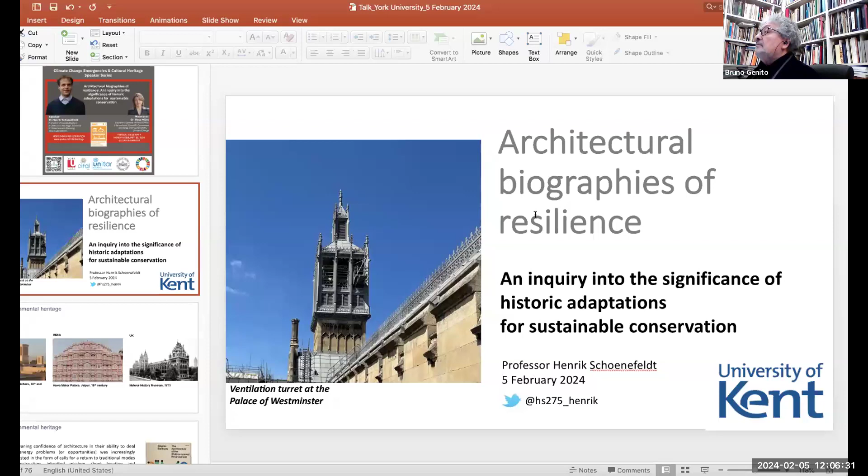Thank you for introducing me. I'm just going to share my slides. Can everybody see and hear me? Yes. So.

I've given this talk the title Architectural Biographies of Resilience. I've used the word biographies because it gives us a different way of looking at buildings that have lived, essentially, like us. As humans, we talk about the lives of people as biographies, but we can also talk about the biographies of buildings, which is essentially the history of buildings in use.

And we can look at buildings in use also from a climatic perspective. So how have buildings in the past that were designed at a particular moment in time continued to evolve and adapt to the changing environment in which they were placed? Because the environment, particularly if we think in much broader terms, is always undergoing change.

And through historical research, it is actually possible to understand how in the past climatic and other environmental factors, such as urban pollution, for instance, have shaped a continual engagement with the relationship between buildings and the environment, and how buildings at times had to be repeatedly adapted using the new advances in technology and new requirements to

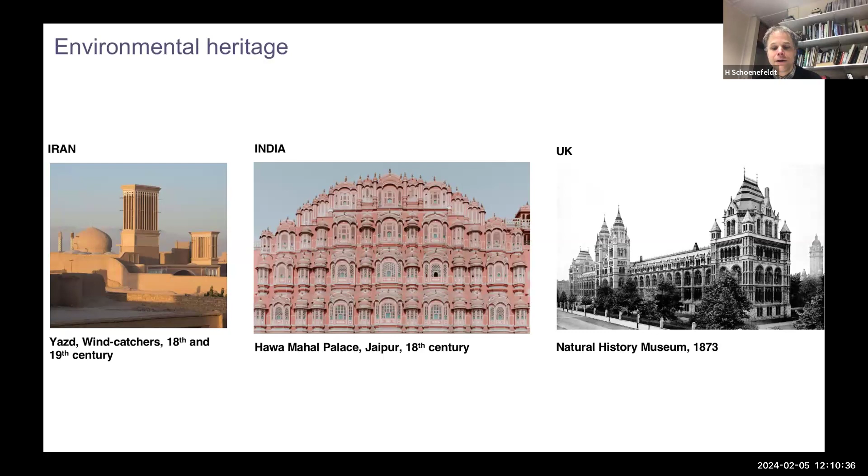but also other buildings that might be less associated with environmental thinking, like, for instance, the Natural History Museum in London, which is a 19th century building, is also for its time a building that engaged with particular ideas of how buildings relate to the environment and the role of technology in that. So we therefore can talk about an environmental heritage in architecture.

And one key thing when we're looking at this is to understand that architectural historians have for a long time really not given sufficient credit to the fact that the development of architecture has been shaped in fundamental ways by environmental and climatic considerations. And in the 20th century, there's one individual, Reyner Banham, who was a very outspoken critic of architectural historians in that respect.

So he published a book in 1969, quite a long time ago, and a period where we maybe would not necessarily expect environmentalism to be at the forefront of architectural writing, but Banham was actually making an argument that the advances in environmental technologies should be part of the canon of architecture history writing, not a side interest of architectural scholarship.

And what's interesting is that this book, originally published in 1969, was written at a time of great enthusiasm about technological advancements and the freedom that developments such as air conditioning and mechanical ventilation provided to architectural development. There was a second edition that came out in 1984, post-oil crisis, where he was actually criticized quite a lot for the types of arguments he was making in the 60s in favor of embracing technological advancements to allow new architectural opportunities.

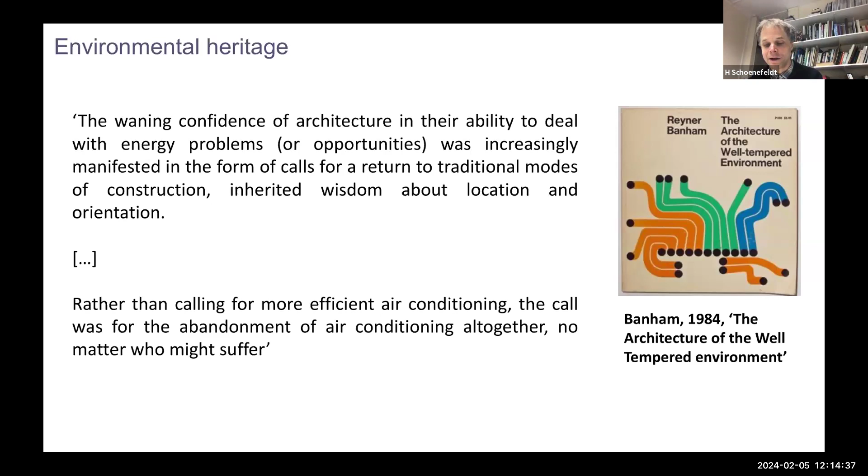So as we are engaging with this sort of criticism, this tension between modernity and traditional principles, we need to find a solution that finds the midway between those two approaches of dealing with the adaptation of existing buildings: not to disregard the historic principle as completely outdated, nor to completely throw out the modern achievement, modern technologies, as being a problem. So it's finding the balance.

And what's interesting is this interest in environmental heritage, of course, is a global thing. I want to really highlight this. Canada has a lot of traditions of indigenous cultures and their way of living with climate. That is part of this vernacular tradition. And there's wonderful work that's been done, particularly by Paul Oliver, who is trying to catalog and map some of these rather under-threat vernacular traditions and ways of living of architecture. That's part of the story of a knowledge and intelligence of environmental design that's embedded in historic structures.

So this is not just entirely limited to studying buildings in the UK, which I may be focusing on today. Methodologically speaking, this is something that can apply to any context. And interestingly, this idea of revival that in some ways Banham was criticizing, people making this naive claim that the past can provide solutions to a more low energy future, is not actually a thing that was isolated.

You have architects working in Egypt, for instance, who were actually making this claim that vernacular architecture can potentially provide solutions to providing more affordable housing using local materials and established methodologies of construction. So he wrote this book, Architecture for the Poor, in 1973. In 1986, he wrote another book, almost a counterpart to it, that highlights the vernacular climatic principles that are embedded in the same kinds of housing he was promoting as a model for a more low energy future.

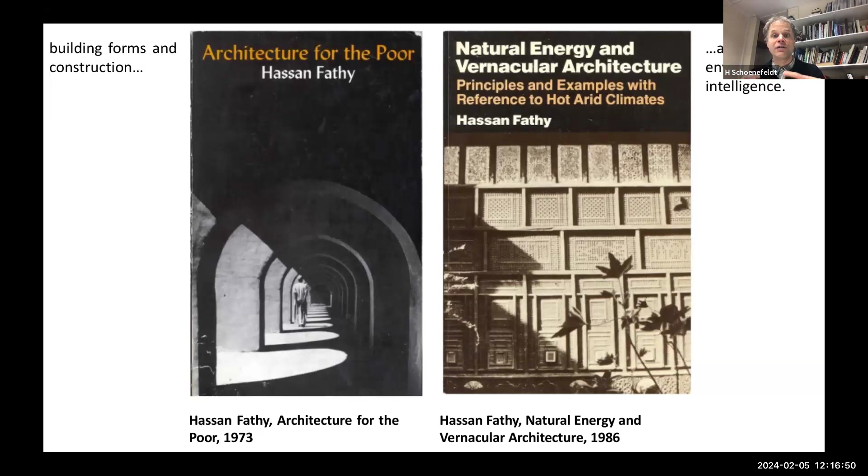So what's interesting is there's an interest here in historic principles as a way of looking forward into the future. Whether this is realistic or not, this is indicating this is not just about studying the past, but it's actually about engaging with the past to look through the lens of our current challenges. And we see some of these ideas actually put into practice in more recent times.

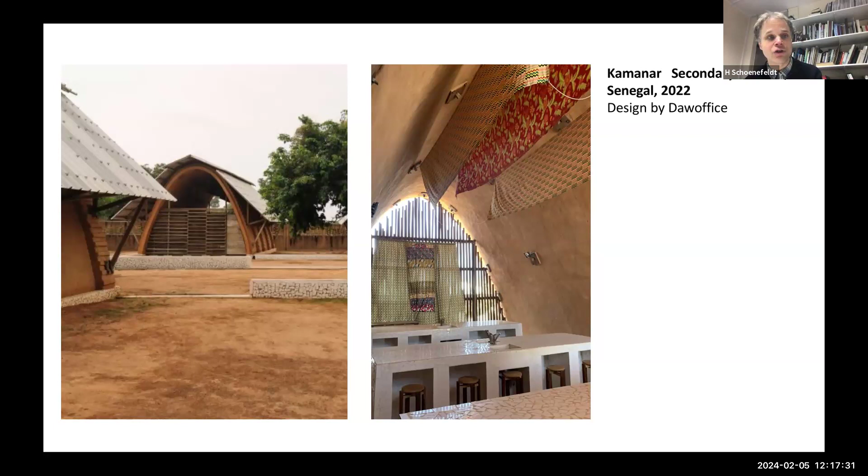So the Dawoffice project here in Senegal, a secondary school from 2022, is an example of a modern attempt at reinterpretation of some of these vernacular principles of designing buildings with local materials and also adapting to climate that didn't rely on heavily mechanical solutions that are heavily energy intensive. So it's an attempt, as Hassan Fathy did in the 1980s, to re-engage with those passive solutions of the region and appreciate the intelligence that we can gain from them.

So this overlaps quite interestingly with other pieces of work that look into this idea of a rational regionalism. Regionalism is very often associated with styles that are very regionally distinct, but that regionalism also has a climatic dimension. So Victor Olgyay, in his book Design with Climate, is exploring that notion that there's a form of regionalism, of climatic intelligence, of adaptedness to the local conditions, that we can potentially learn from to make our buildings more climatically adapted, rather than relying entirely on technologies to adapt to the environment.

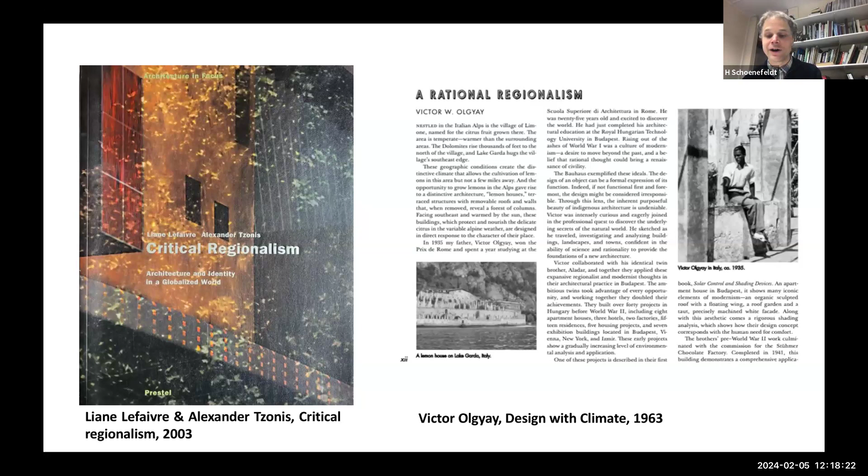And to me, this actually raises an epistemological challenge, because in some ways we have a schism at the moment where we've got, on one hand, a history of architecture that to some degree hasn't sufficiently engaged with the climatic aspects. The scholarship in this area is growing now. It has been growing since Banham wrote. A lot more scholarship has emerged in the area, but there's still quite a lot of architectural history that doesn't really engage with the subject.

So we have an emerging history of environmental design, almost as a sideline subject emerging in the scholarship. There are famous people that were writing in the area, like Dean Hawkes, for instance, writing for a long time about the history of environmental design in architecture. And we find actually something rather similar emerging. So we've got the schism between architectural history and history of environmental design.

But we've also got a problem where we're looking at architectural heritage problems today as being a contemporary issue, without the understanding that architectural heritage, in its relationship to climate, also has a historic dimension.

So I believe that actually architectural history is a means of establishing a dialogue between questions of environmental design and historic buildings today, and the environmental principles that are inherent in the design of those historic buildings. So when modern engineers come in and want to introduce new technologies, rather than trying to work with the historic environmental principles, that can be an issue.

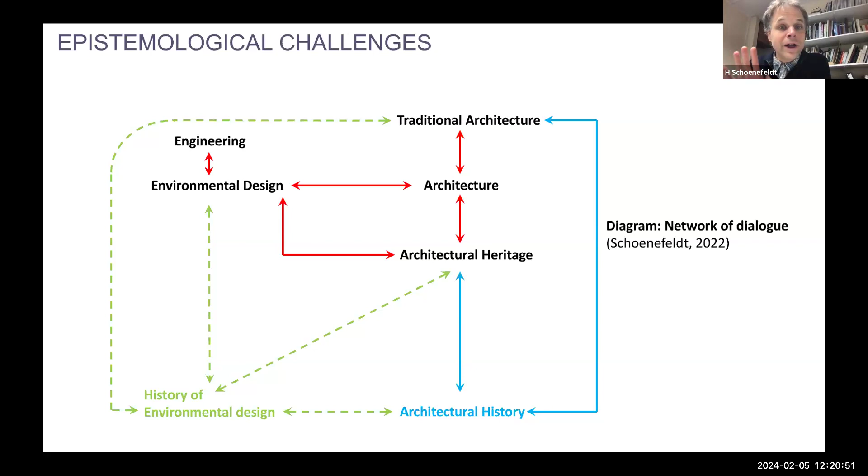So that is sort of a way of conceptualizing that, and we're seeing this in this contrast between Reyner Banham bringing an environmental dimension in the 1960s, and another book that was written almost at the same time, The Sources of Modern Architecture, which talks about some of the same buildings that Banham talks about, without making any reference to the environmental dimension of the development of modern architecture.

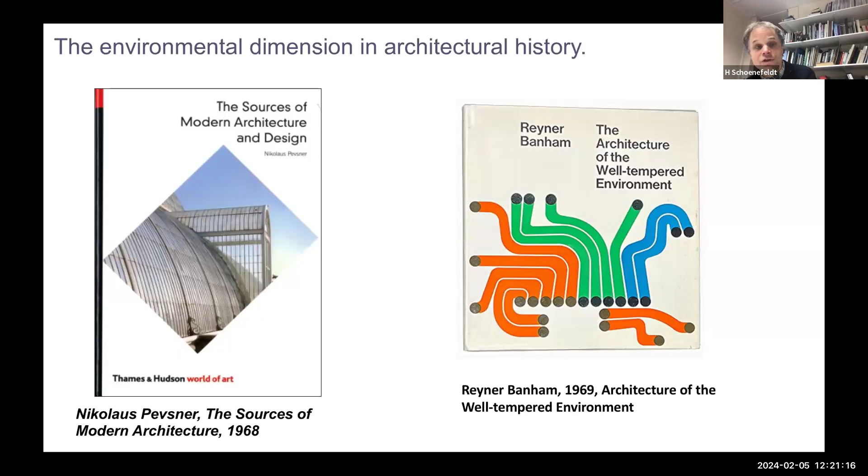Another element I would like to add to this, and this is something that people like Reyner Banham don't really engage with, and I think architectural history in general doesn't show very much interest in, is the fact that buildings are occupied for a long period after they're built. So we might go back to the time they were constructed and understand how designers were thinking about climate and environment. But what we do know is the buildings that we see today are rarely really the building that they were when they were constructed.

Buildings are heavily adapted, even if they don't necessarily appear to be. Some buildings are quite deceptive, including the Palace of Westminster, which might on the surface appear quite original, but it's actually heavily adapted, as are a lot of other buildings of its period. And there is this book by Stewart Brand, which was written in the 90s, which tells us about what happens to buildings after they're built. He talks about lots of different changes, particularly the aesthetic changes, the internal changes of buildings. But the way buildings were adapted environmentally over time is part of the story.

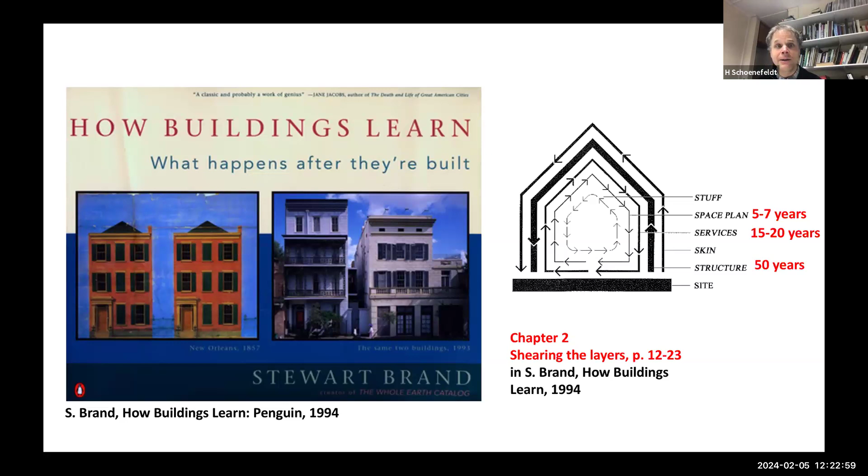So a building that might have been designed 100 years ago with particular environmental technologies in mind, those technologies are no longer in use, nor are the passive principles embedded in some of this design still in the consciousness of those dealing with the buildings today. So a part of my research is to build on that four-dimensional view of architecture, seeing buildings over time and after completion, that the relationship to climate is actually ongoing. It's not a static relationship.

And we're seeing examples of this in buildings. For instance, here is a building, the state capitol in Chandigarh in India, by Le Corbusier. As we go around that building, we're seeing a lot of air conditioning units being retrofitted into a building that wasn't designed for air conditioning. So there's an example of a building that was designed with a very particular approach to climate that's now been adapted to new technologies. And the question is, if that changed again today, would we approach it differently? Is there a way we could go back to the original principles of living without air conditioning and making these buildings work? This is a very important question.

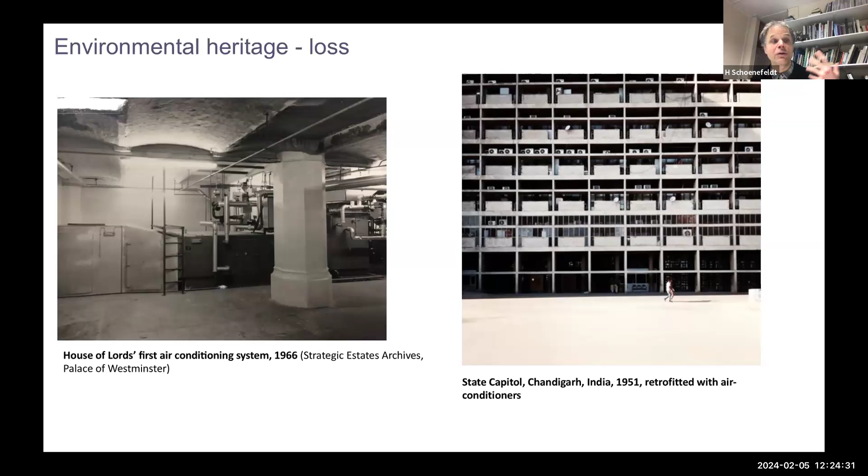On the left-hand side is another building, in this case in the UK. This is actually in the Houses of Parliament, under the House of Lords Chamber, the upper chamber of the British Parliament, where in 1966 modern air conditioning was introduced for the first time. Before that, from 1854, it was climatically controlled using a Victorian approach to climate control, ventilation and cooling, that was to a large extent passive. So this technology marks a technological transition in the history of the building, where the original principles have ended.

So in order to understand the original and later relationship of these buildings to climate through technology, we need to look at buildings in a much more comprehensive manner, and I would describe them as deep case studies. So we need to look at the historic building, its anatomy, the way the building is built, both in its historic form and in its current form, but we also need to understand the process behind them.

How were they originally designed? What were the original objectives and ideas behind them? But we also got a history of these buildings once they were completed. How were they operated? And how were they continued to be adapted and why? So that we're really understanding these buildings over their lifetime.

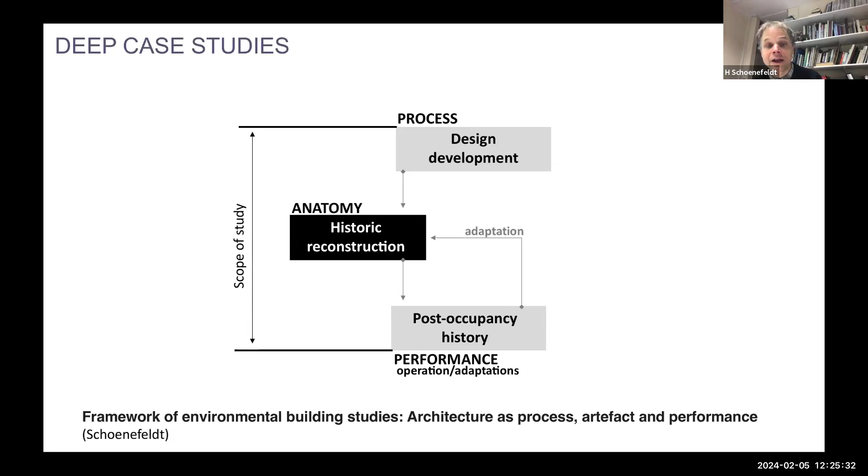So I talked about biographies of buildings. That's what I'm talking about here, is that we really want to understand the whole life cycle of a building climatically and how the buildings fared and respond to climate.

So I've written a book, and this is part of a research project. This was actually in the first half of the project, where I've actually looked at the original design of the Palace of Westminster and understand what were the original ideas behind it and how were they implemented and how well did they perform originally. So trying to really critically assess that in great level of depth. And this is the first study to do that.

There is a little final chapter in this also that looks a little bit at what happened to the building after it was completed, and seeing what type of investigations were done and why over time after the building was completed. But it focused very much on the original systems and how they were performing over the lifetime of the system. So in this case, almost 100 years in use.

And one key thing with the study is that the building had essentially, there's one aspect of the building which are the systems. So we're talking about heating systems, cooling systems, the sort of plant that was used. And then we got a system of flues that were running through the building to supply and extract air from rooms. So these are the things that are physically evident in the building.

But we have also other things that are slightly more ephemeral, that are also less obvious related to climate. And one of them is the role of the design of the building fabric. So how far do, for instance, the design of the windows were informed by climate considerations, particularly the original windows, which are not always in place anymore.

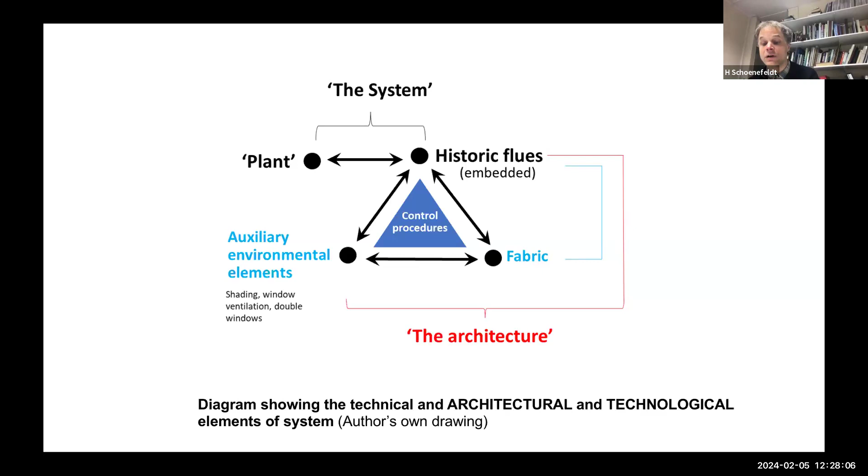So there is a relationship between architecture and technology in that building that needs to be understood fully in its design. And one key thing that's really important about 19th century buildings, so the Palace of Westminster was rebuilt after the fire of 1834, a big fire that destroyed the medieval complex of buildings, and then was rebuilt after that period using 19th century technologies of construction, environmental design.

But it was also a period of transition, a period where actually modern building services, the idea, for instance, having ducted ventilation, central heating, and so on, were existent already, but they haven't necessarily been employed at a very large scale at this stage.

So this building in the Palace of Westminster is quite unique in that it actually attempted to integrate systematically a centralized ventilation system where all air was supplied and extracted centrally, and also still to utilize some of the more older techniques of simply opening, closing doors and windows for ventilation. So we're in a state of hybridity where we have old, non-technological ways of managing environments together with more technological ways that were emerging at the time.

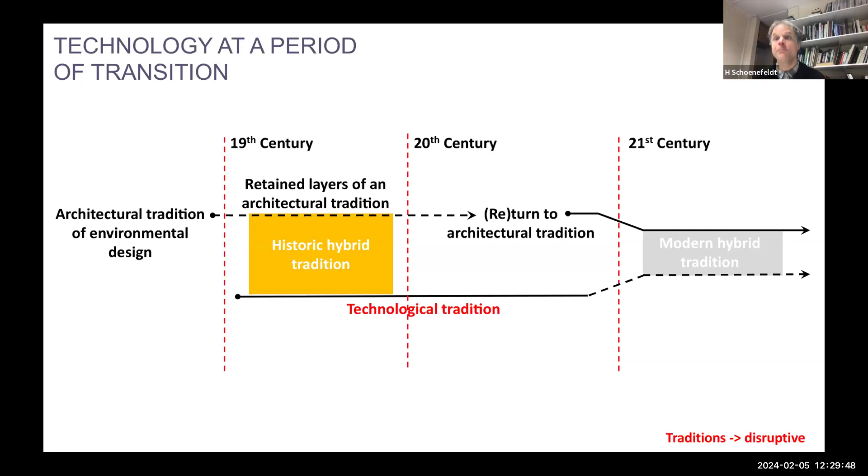And that in some ways mirrors what we're trying to do today in sustainable architecture, where we're trying to return to as much as possible passive means, while at the same time harnessing the opportunity of modern technologies. So the first half of the 19th century was in a similar stage of transition, where we see two stages coexisting.

So the type of modern technology we find, here's an example of a big plant room that provided steam power to drive fans and heat. That was plant that's sitting in the building. That's no longer there, that disappeared, and was replaced by newer technologies over time, the way the building was heated and or ventilation fans were driven.

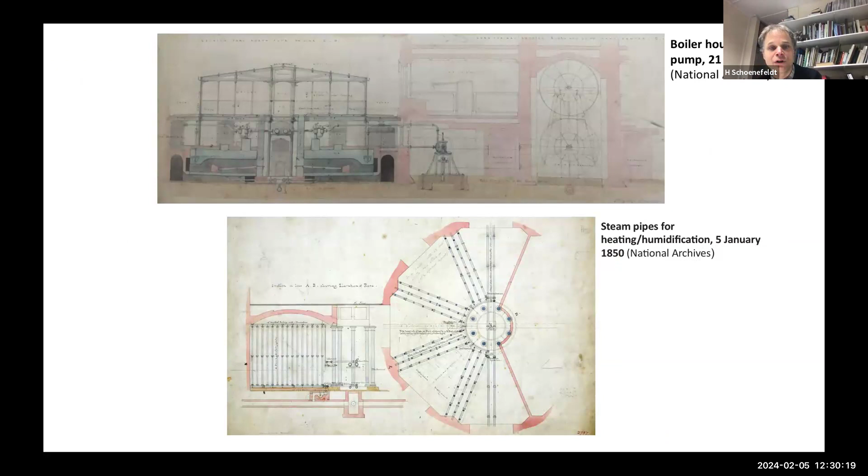But it also had a lot of things that were passive, particularly the use of towers to drive air through the building. The entire building was actually designed to have large spaces in it. So the whole basement was used to distribute air through the building. That air was then brought into the spaces and extracted at roof level through towers again. Essentially, they used the architecture, building towers, to create natural convection.

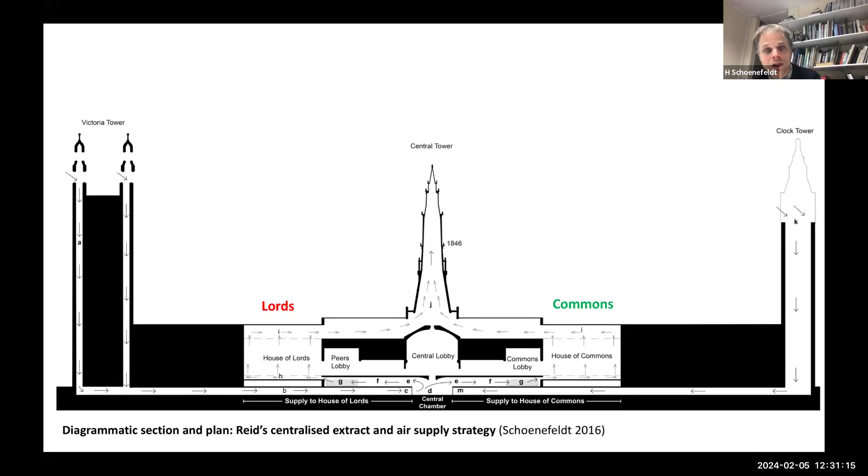These elements are still in the building. So 25% of the internal space of the building is still occupied by these historic voids that were used to distribute and condition air within the building.

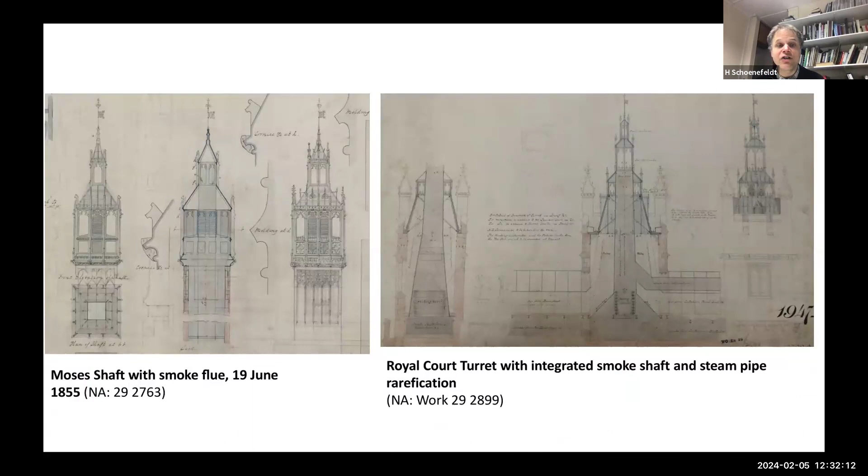But if you're looking into the historic details, we can learn how these towers functioned. We're seeing they were not just purely ornamental elements, but they contain smoke flues, for instance, and air vents to extract air and smoke from the building. So they're using natural stack principles to drive the air through the building.

This is part of the architectural language of a 19th century ventilation system that shaped its architecture in really fundamental ways. In order to understand this, I had to study thousands of documents, including letters, drawings, sketches, parliamentary reports, to gain a full understanding of the original intention behind it, how it was implemented, etc., and how design ideas were discussed and evolved over time.

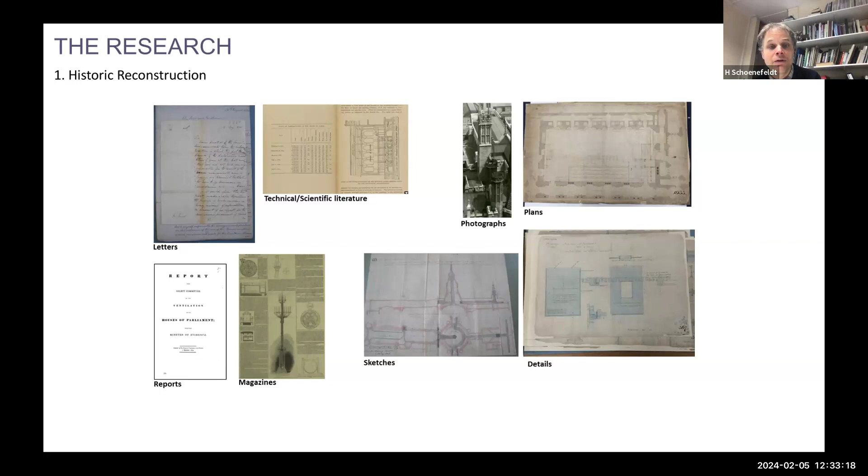So we can dig deep into the original environmental thinking of its time and compare that to the way we think about it today. But aside from the archival research, because I'm seconded to Parliament, I can also study the building itself. I spend a lot of time systematically mapping the surviving features of that historic ventilation and climate control system, and here's a few photographs of ventilation shafts and air chambers in that building.

That gives you an insight into the quality of these spaces. Some of these are spaces on the floors, some are flues in walls, and others are spaces you find in the roof spaces of the building. So this 25% of the entire space is occupied by voids like this, hidden within the fabric of the building, but big enough to enter and walk through.

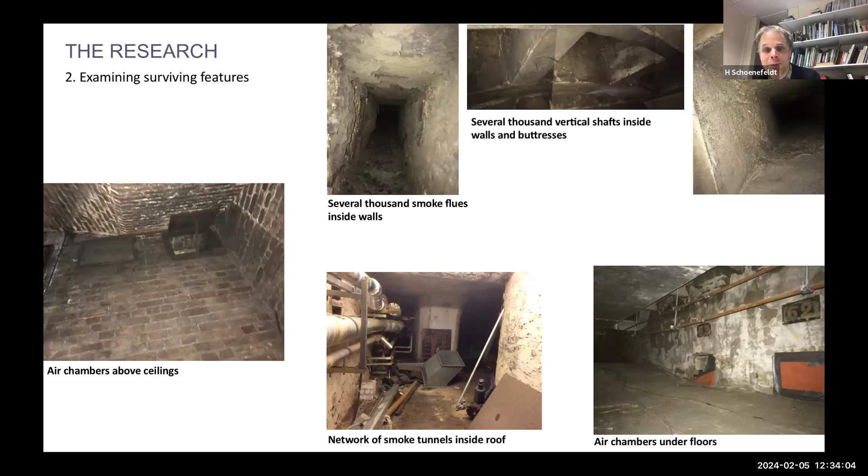And when we're looking at historic evidence, we can also understand how these spaces actually originally functioned. You still find those spaces in the building, but they're no longer used the way they were originally used. Historic photographs show us the equipment that was placed inside them.

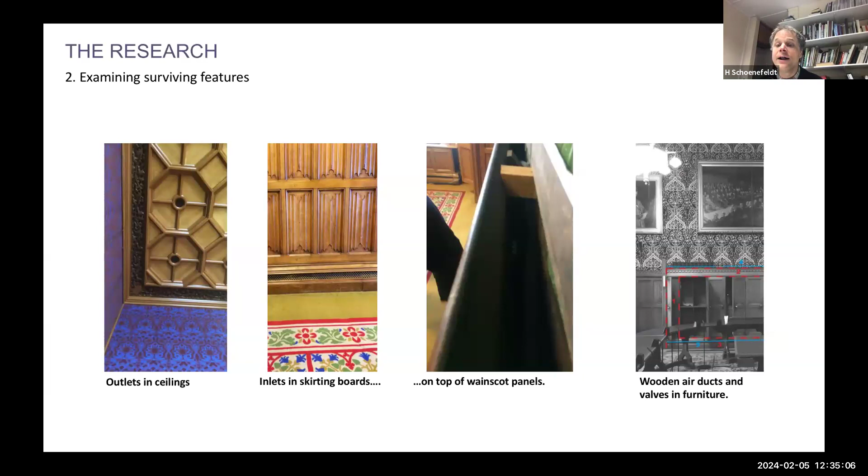Equally, when we're looking into the fine interiors of some of the committee rooms, for instance, we're seeing that a lot of the ornamental detailing was actually shaped by ways of supplying and extracting air. So we've got ceilings with perforated woodwork, skirting boards, wainscot paneling that acted for the air supply. We even have furniture that contains wooden ductwork to supply air into the rooms.

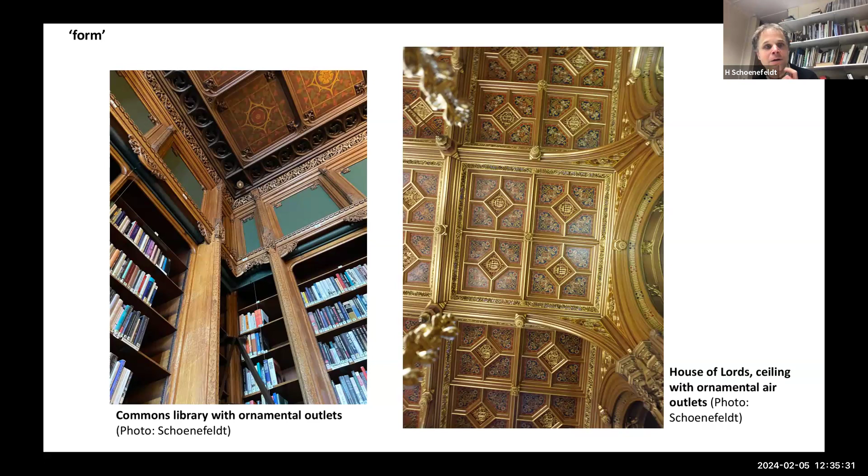That's really important to realize that even those ornamental features were shaped by historic environmental thinking. These spaces are not just on the floors and inside the roof spaces. We also find that the entire walls of the buildings are permeated by vertical shafts that can be mapped, to understand how they're all interlinked and how as a system they worked in the original design.

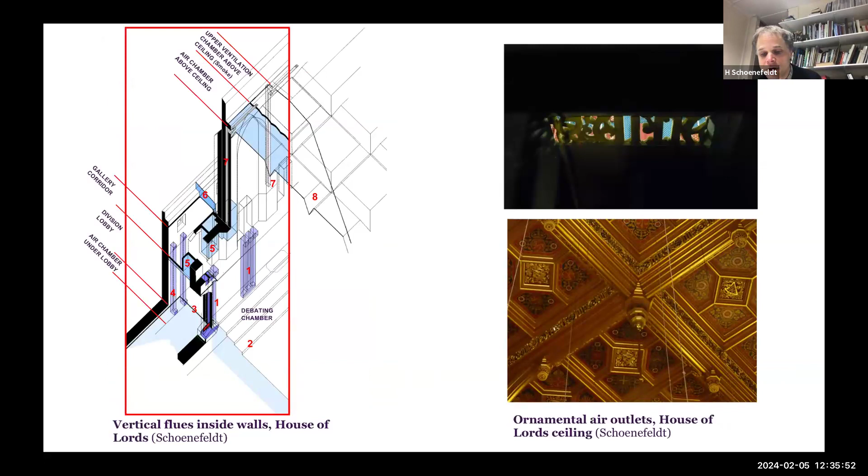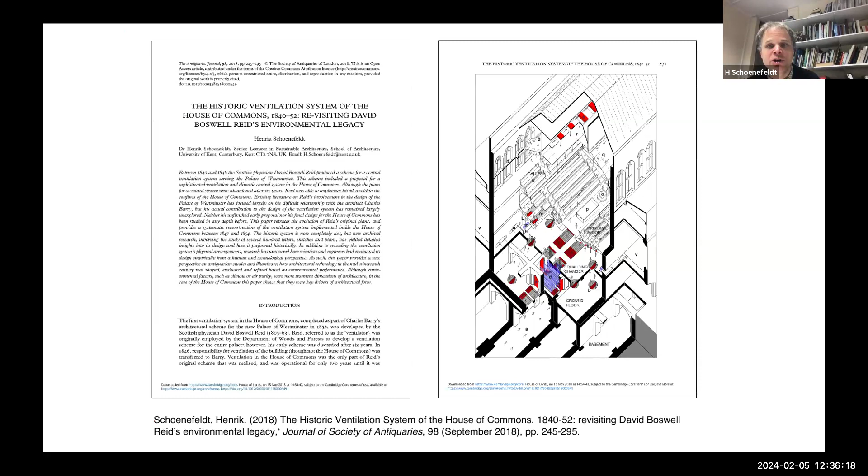In some cases, some parts of the building, like the House of Commons, which was bombed in the war, has been lost entirely. But through my archival research, it was possible to reconstruct the original design and produce drawings to show what it used to look like, how it was operated, and how it had performed, to really learn and critically evaluate these historic approaches to climate control in these important spaces.

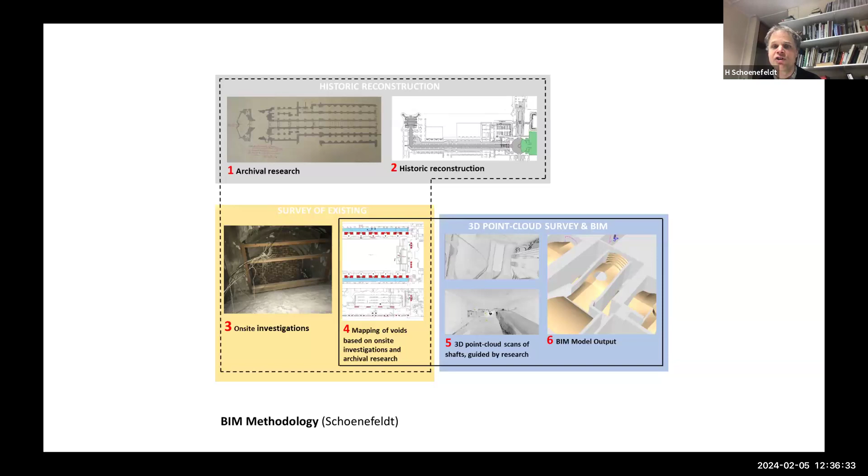This research also underpins an exercise of surveys and trying to use modern computational models or building information modeling to essentially capture the original ventilation system in 3 dimensions. Here we got a Revit model that captures all of the voids surrounding the House of Lords chamber, so that we can now actually work with these principles and systems and rethink whether these could play a role in the future design of the building, informed by this understanding. So these models form quite an important bridge between the historical research and the design studies to be done.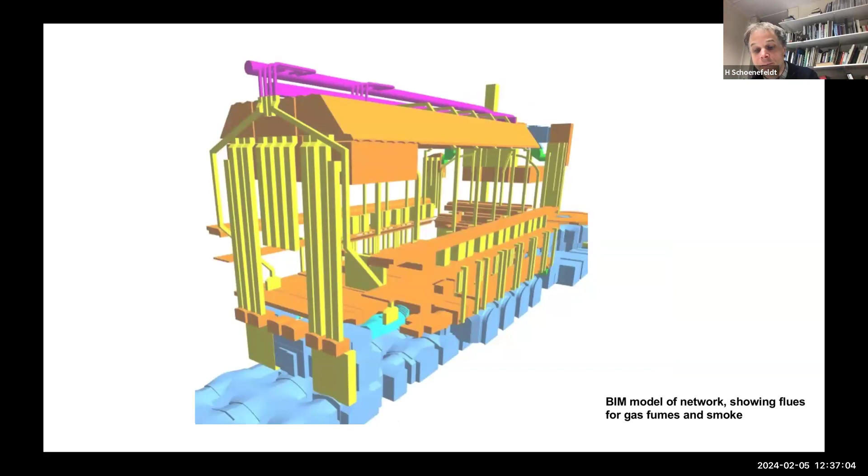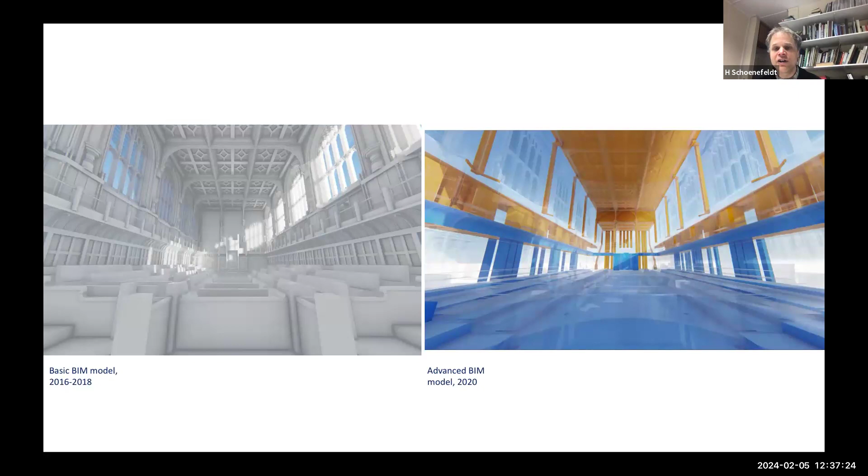Here's another view where we see on the left-hand side the basic building information model, which just shows the interior surfaces, and another where the mass of the building is turned transparent, and we see the voids that were modeled as a result of the research, showing the hidden ventilation system within the fabric of the building. So systematically documenting that, this is really illustrating that this research is informing architectural practice.

I've actually written also some articles for professional journals. Here's one for the Institute of Historic Building Conservation journal, an article exploring what it's like to be seconded into a large project and leading as an academic these projects. And similarly, another one in the Royal Institute of British Architects journal.

I've written a piece on this journey of actually moving from academic scholarship into something that informs directly into the practice of environmental design. This is just another example, the CIBSE journal and the ASHRAE journal. These are journals for professional building services engineers. ASHRAE is in the United States, CIBSE is in the UK, although they're quite international organizations now, but they've shown great interest in this scholarship and seeing its relevance to practice.

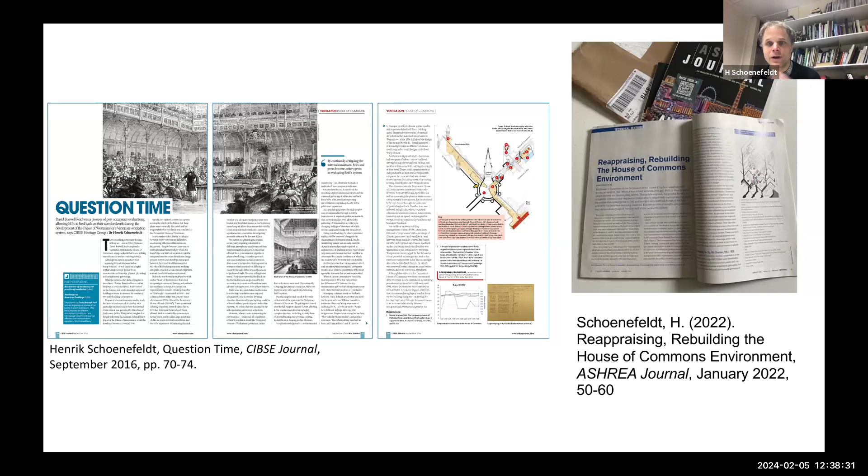So that is about actually capturing the architecture of this historic system, but we need to go beyond just thinking about them as physical artifacts. We also need to understand how they were operated.

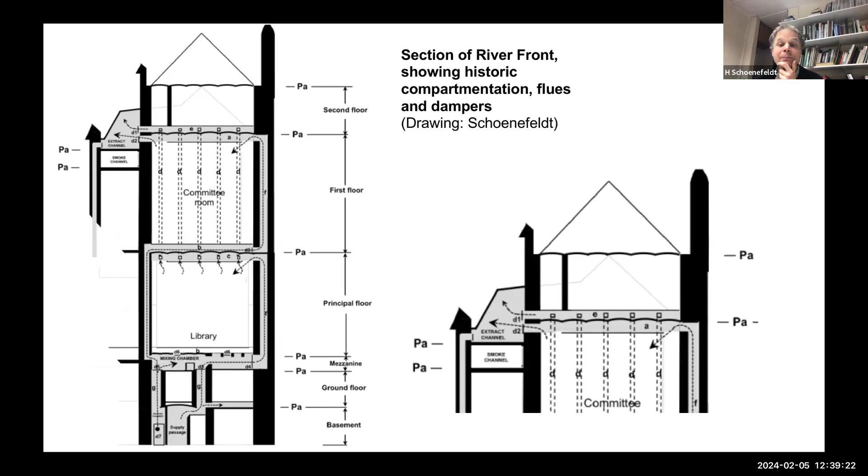In particular, the ventilation system—a lot of them were operated manually by people. They had valves in them to manage the climate conditions, and also to manage the fire risk of some of the voids, so the fire couldn't spread through voids. They had valves and dampers to try to control that. Here's a cross-section through a part of the Palace of Westminster, where you can see in gray all the voids going through floors and ceilings, how the air is traveling through them, and the position of dampers that were used to control the airflow through those spaces.

And we can actually map them. As part of my research, I was systematically mapping the surviving historic dampers that staff are operating to control the system. This building's resilience relied very much on the operational regimes, or how well the building was managed by the people in charge to respond to the changing environment around them.

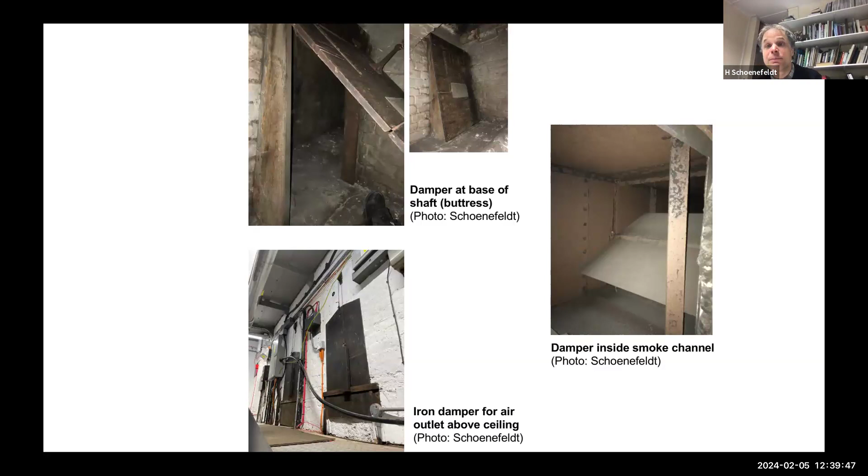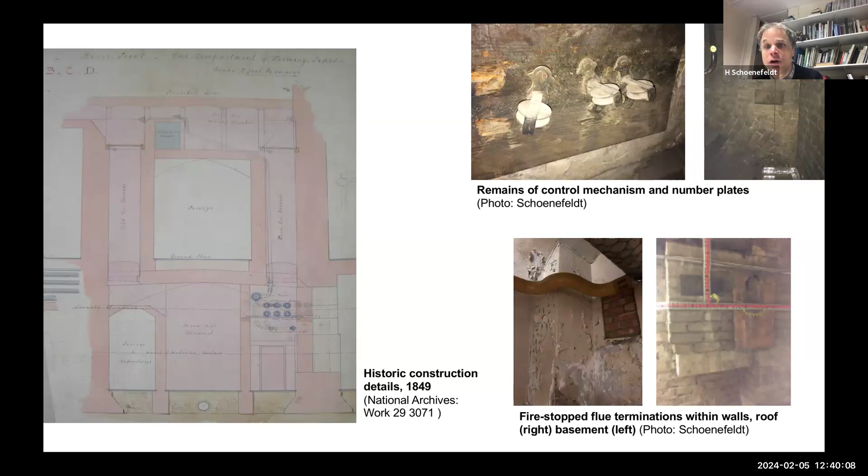What's interesting is some of these dampers we have remains of the control mechanisms—pulleys where people were pulling to open and close valves. We've got historic drawings showing us how these valve mechanisms worked in the building. A lot of them are now bricked up and lost.

But what we also have is archival evidence telling us how the building was operated by staff, and the type of logbooks that attendants kept with temperatures and operational procedures. We also have reports of studies that were done over the lifetime of the building to understand how well they performed. So we can really critically evaluate their performance based on that historic evidence, and as part of my research, I spent a lot of time studying them.

And one key thing, and this is something that people might forget, is that a lot of public buildings in the 19th century, in Europe in particular, and in the United States and North America, were actually monitored manually using rather simple methods like thermometers to monitor at least the temperature in these rooms and record it. So we have a historic record of historic climate conditions and historic internal conditions that we can study.

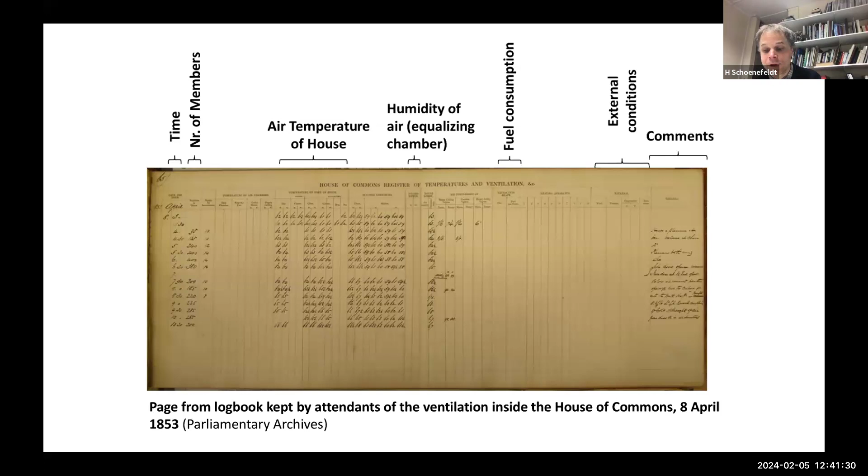So here's an example of a historic climate logbook that logs the internal temperatures, while we also have historic weather data that corresponds to that. And we have data on the occupancy. So we can actually do a critical evaluation of how the buildings were performing under the climate conditions they encountered, including eyewitness reports of how people felt in those environments.

But this wasn't just about the day-to-day operation. They sometimes got scientists in to study buildings and how they behave in a more systematic manner, and also propose improvements. And this was evolving as the natural sciences were evolving, with more and more advanced techniques trying to understand the behavior of the environment in these spaces and how they can be improved. So advances in the sciences were quite critical; how buildings were adapted to climates is largely informed by better understanding of it.

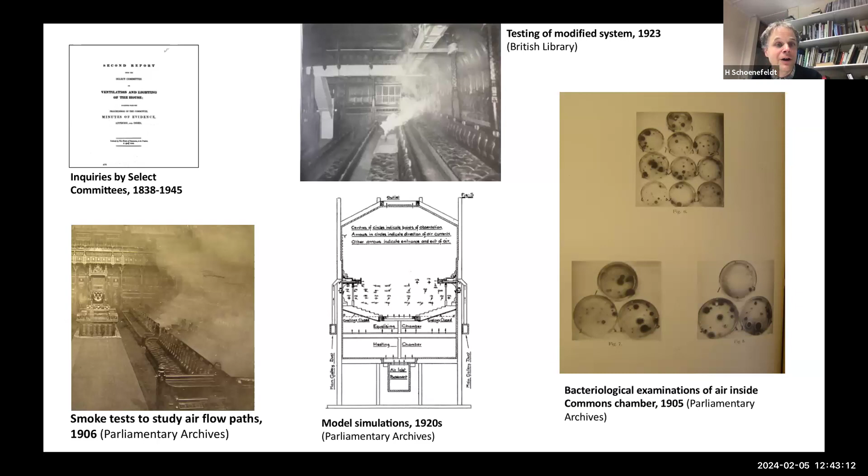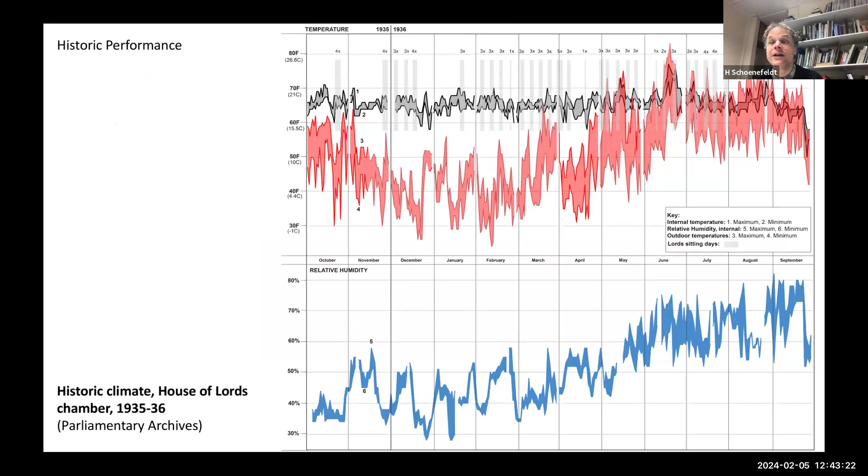And this also sometimes engages with questions of pandemics like the ones we had recently in the world, like the COVID pandemic. We had a similar situation in the early 20th century, where other pandemics were plaguing the world, and they were studying air quality from a bacteriological point of view, understanding how far air contributed towards the transmission of disease at the time. So part of my research is to reconstruct climate conditions systematically, understanding how well they performed, and being objectively clear where the limitations of the system lie, and also where the merits of these systems lie.

And one thing I want to highlight is when we're thinking about resilience of buildings, it's not just about looking generally at how they're performing, but also putting a magnifying glass on periods of extreme environmental conditions, because there were actually historic heat waves. One of these in Parliament was from 1856 to 1858, with exceptionally hot summers, where they experienced major overheating issues in the Houses of Parliament. The temperatures were noticeably higher than previously and for much longer periods.

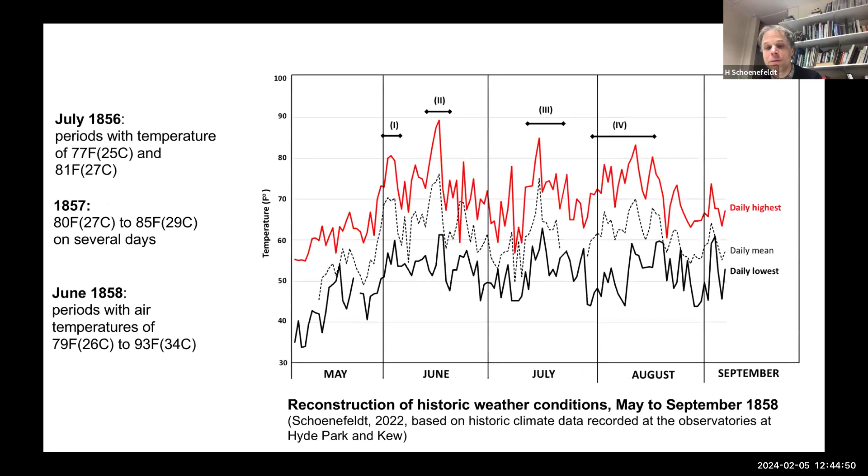So here is a historic reconstruction, a diagram produced from historic climate data, showing the type of climate variation that was encountered at that time, to really understand the thermal stresses they were encountering and how the building was faring under those conditions. And we also find evidence of emergency measures that were taken to adapt to this environment temporarily, devising additional ways of cooling the building, for instance. So we can see, as a biography of the building, this operational adaptation happening temporarily over time to respond to this extreme heat.

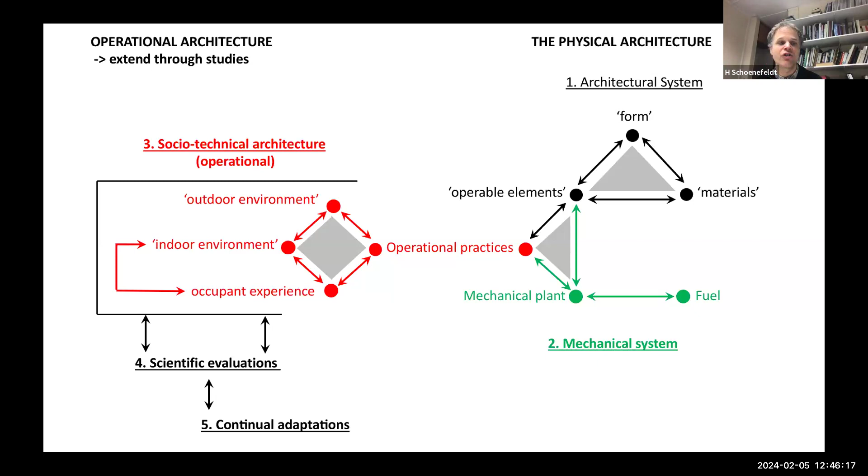How were they responding to the external environment, how they were responding to the internal environmental use, and also how they dealt with that rather challenging condition of having users who complain. So have a building that's really responsive to those elements. And this was then enhanced through the scientific evaluation I mentioned earlier, and a process of continual adaptation.

So we have actually an evolving architecture, even in a fine building like the Palace of Westminster, which we might think is quite original, but it has been continually adapted from an environmental point of view. And here is a study that I've done on the House of Lords, looking really about technological transition of climate controls from 1854 to 1966, understanding really how did these buildings adapt over time.

And here is just a very basic timeline, and just a few points I would like to highlight here is that the original system was established in 1847, but in 1854, they were already modifying the original system in the House of Lords, making quite significant adjustments to the original design to make it work more effectively. So within only a few years, the building started to be adapted environmentally.

And this journey of continual adaptation continued over time, where people started to modify window designs, for instance, to provide more effective cross ventilation to the building. Well, the building was originally designed to be sealed, so they were continually adapting to that. And the building started to be operated differently. So that operational history is really important because it shows us how buildings really worked day-to-day rather than what the designers were originally claiming.

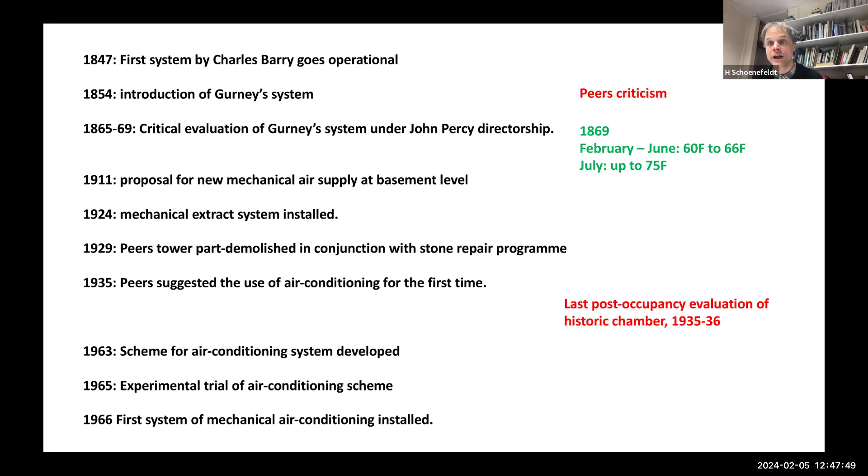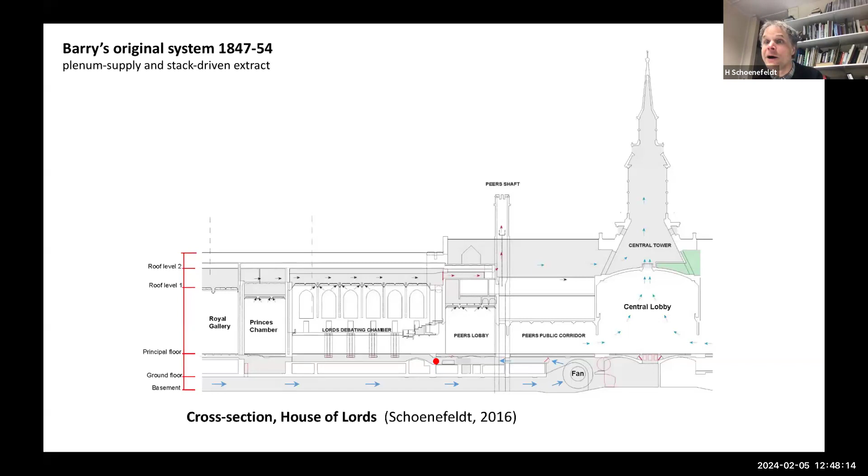So in 1854, when Goldsworthy Gurney, another specialist, was brought on board, revisiting the original design and seeing it had problems, he was actually reversing the system and making it entirely stack-driven. So getting rid of the fans and also starting to introduce operable windows as a supplementary ventilation feature. So at that point, we have two systems in place, a natural system of direct natural ventilation and a natural system of stack ventilation that relied on towers to ventilate the building.

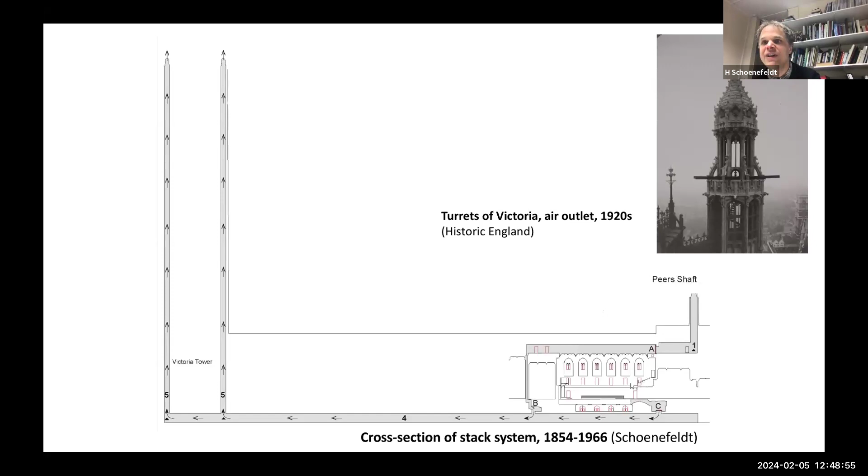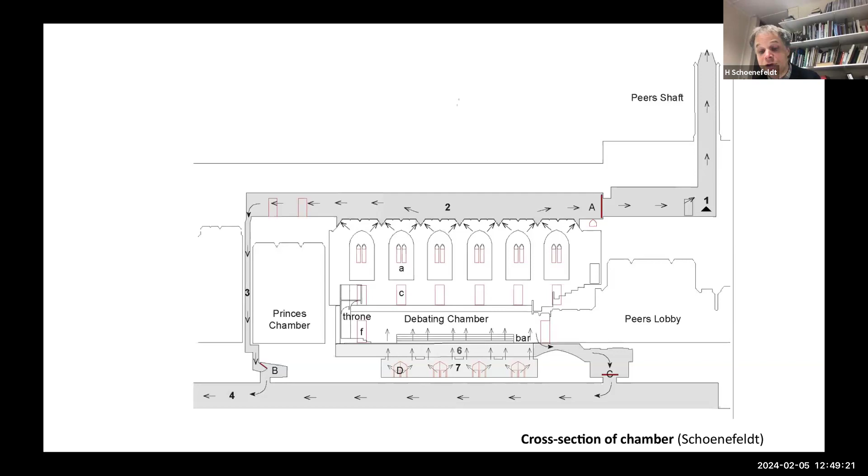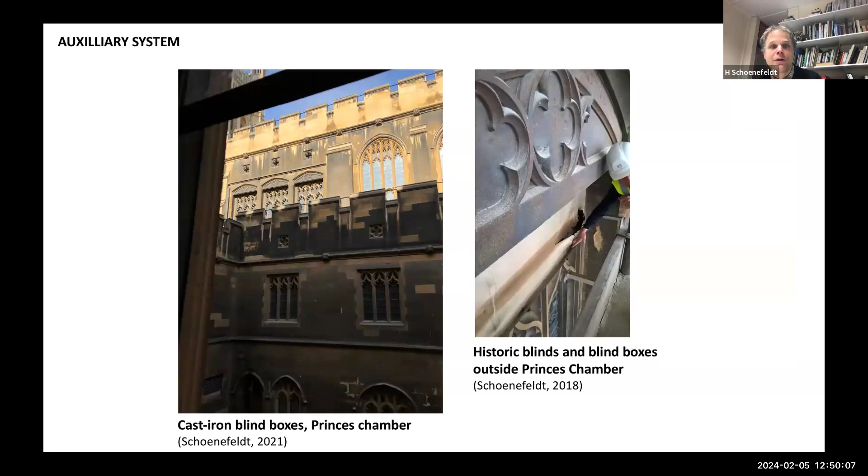And we also got photographs showing us historic shading arrangements to provide protection from solar heat gains in the summer period. So part of keeping the interior cool was to use shading. And these are no longer with us in the air-conditioned environment, but we still find remains of these shades, evidence of them, although no longer in use. Here, for instance, is a part of the building where we've seen cast iron blind boxes that are hiding the shades behind them, whilst the other windows no longer have any shading on them because they've been removed since.

And one thing that's really important when we think about heritage features, that's very often a big debate currently, is whether it's acceptable to retrofit shading to historic buildings, because they were seen as not compatible with heritage principles. But when we're actually going back in time, we're realizing that a lot of historic buildings, including major public buildings, had external shading as part of their original design.

So when we're looking at the House of Lords chamber, what we're essentially seeing emerging with the changes I talked about by Gurney is that we have a building that suddenly operates in different ways rather than in just one way. So the building is no longer just sealed.

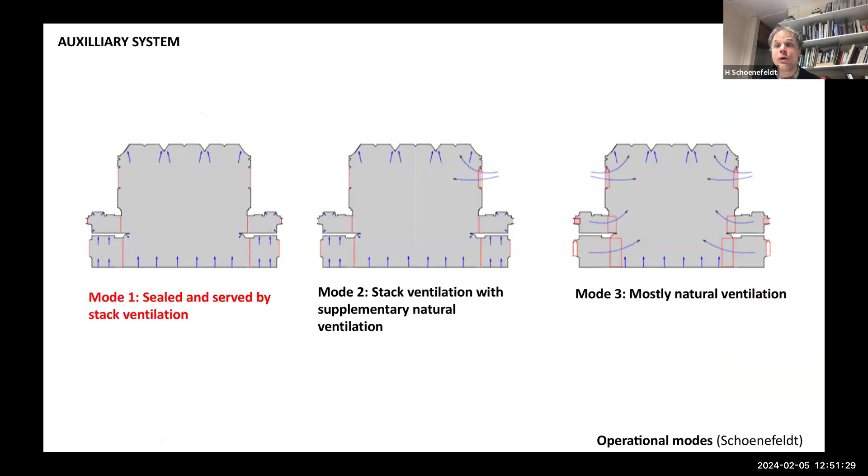So it might be sealed in the heating season, for instance, in the winter period to keep warm. But as soon as it gets warmer, people start opening windows, and this is staff that get involved to operate them in an intelligent manner and also use shading to manage the heat gains of the interior. And we got eyewitness reports of this also about the use of these auxiliary systems. We got written evidence alongside drawings telling us what people were thinking, arguing about these principles.

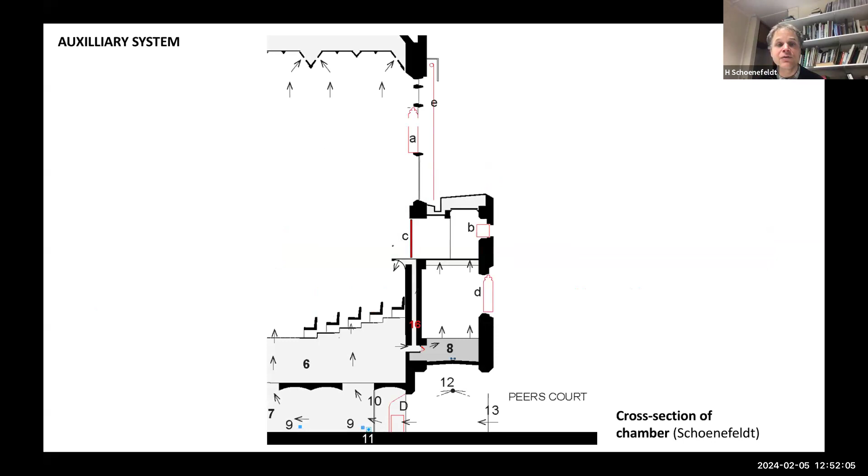And we can then start doing very detailed studies of really understanding how this auxiliary system works, where the doors were located, where the windows were located, to really understand how these were operated and evaluate them, reevaluate them, how effective these might have been when they were in use.

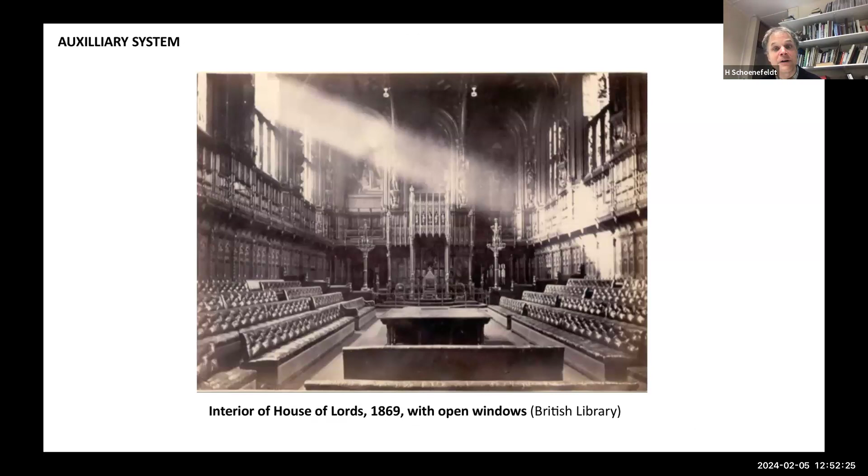So here's a historic interior photograph of the House of Lords chamber, not the way you would see it today. You wouldn't see the windows in the House of Lords open because it's now air conditioned. The windows are permanently sealed. But in Victorian times, you would see those windows being swung open and the daylight coming in at times. So this is sort of historic evidence.

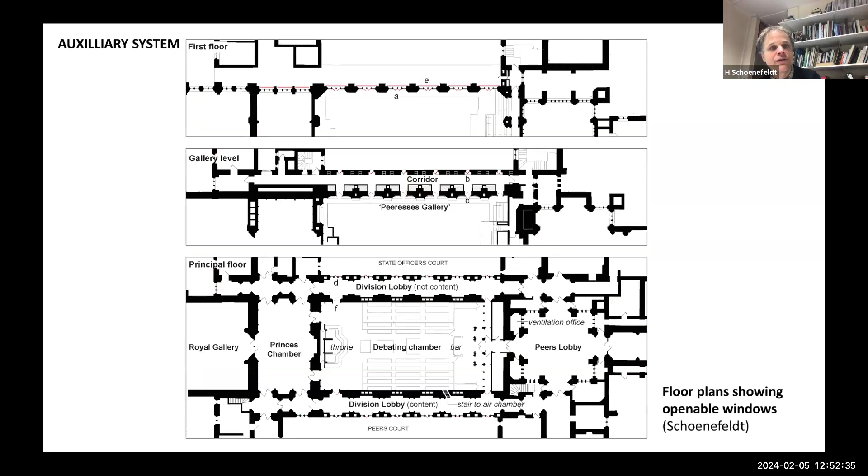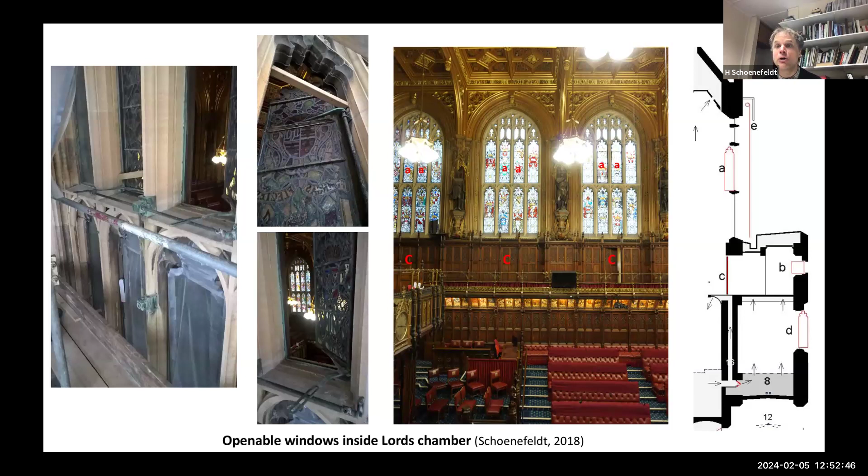And here's those floor plans where I've mapped those optimal elements of the natural ventilation strategies. We still find those mechanisms in the building. So in the House of Lords, windows still have operable sections in them, although they're no longer opened. So the infrastructure for operating them still exists.

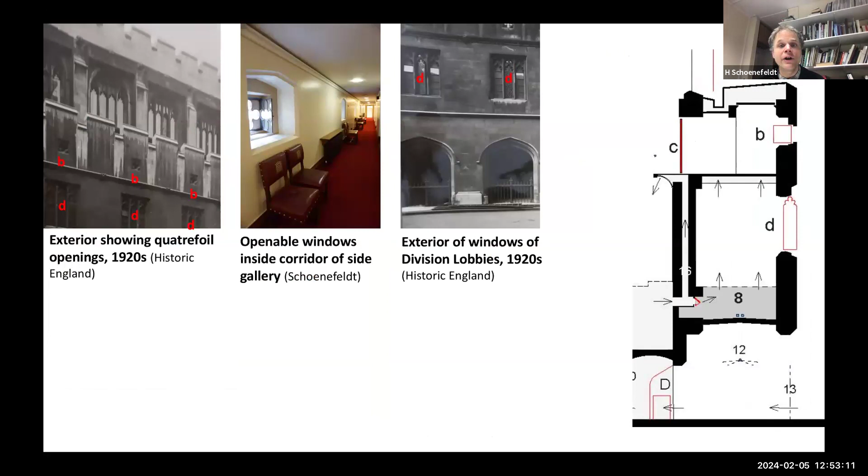And also we find historic photographs showing us that the windows of the House of Lords, for instance, had shading. Also, not just the areas I showed you earlier, the whole debating chamber was shrouded in canvas to keep the windows from excessive heat. We see some of the windows being quite concealed, like small windows into corridors that were opened and so on to help with the cross ventilation of these spaces.

And what's interesting is that the Palace of Westminster experienced severe damage in the Second World War. Most of the windows were destroyed as a result of blasts from the bombs during the Blitz, and particularly in 1941, there was severe damage. And the House of Lords chamber essentially was without glazed windows for a long time.

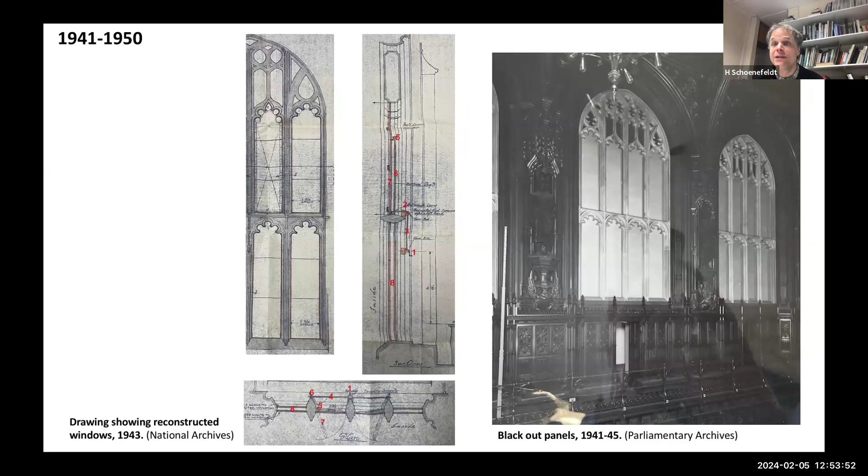So they had to remake those windows after the Second World War, when the building was still without air conditioning. And they were reinstating those natural ventilation strategies, and they were continually used at that time, up until 1966, when the air conditioning was introduced and the building became sealed.

But we've seen that these adaptation measures weren't just limited to the chambers. We're seeing it also happening in other areas, in committee rooms. In the committee rooms, for instance, we find examples of early forms of double glazing being introduced, operable windows being introduced that were previously fixed glazing to provide natural cross ventilation more extensively within the building, rather than relying on those systems I talked about. So they were complementing, and through the management regime, these things were kept in balance with each other.

And really concluding on that element, we need to understand this system. We need to understand them together as one system. So we got the systems designed by the engineers in the original state, with flues and towers and so on. And then we got those auxiliary systems of operable windows and shades that were added on later on to better manage the environment.

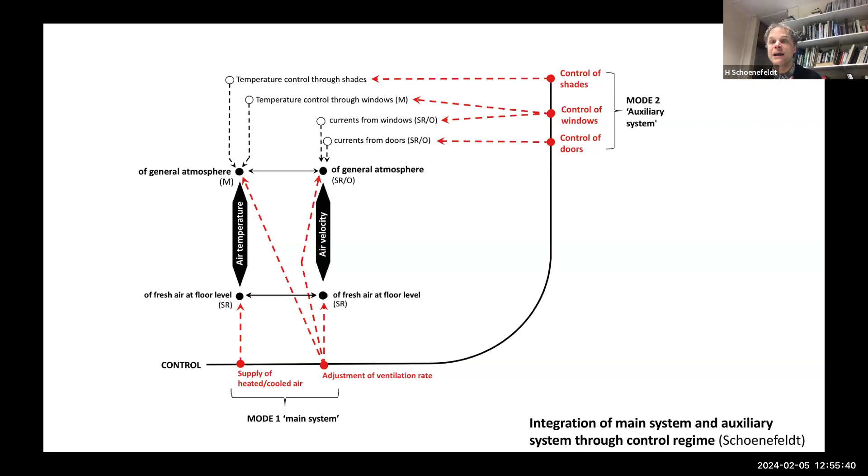And collectively, this we need to describe as the cumulative intelligence, environmental intelligence of the building, of practices that were developed over time. So this is part of the biography of climate responsiveness. So the building retained resilience through its ability to adapt, be more acutely adaptable to the environment it's built in.

And it was in the 1960s, then, in the House of Lords chamber, that air conditioning arrived, marking really the end point of these practices. So at that point, these historic practices of complementary ventilation were no longer in use.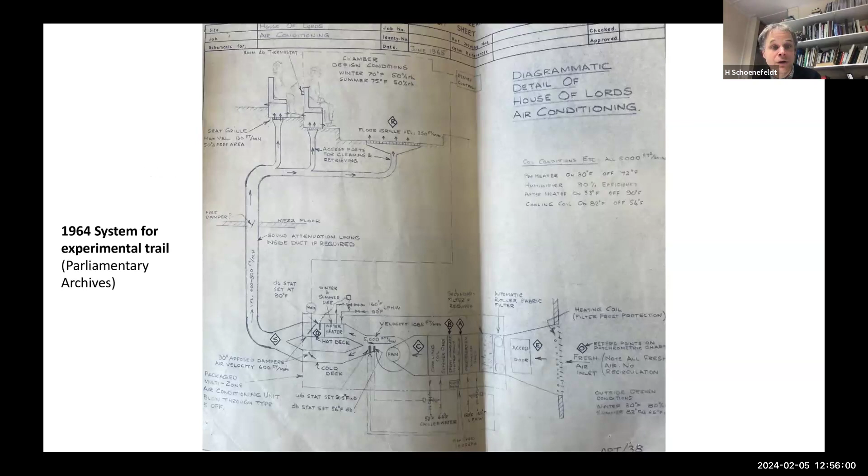And now comes this question. We're seeing now new buildings being built that draw on some of these principles that were originally adopted in places like the Palace of Westminster and other 19th century public buildings. Using stack ventilation is now coming back into fashion in newly designed public buildings, like theaters in particular, and university buildings, faculty buildings.

So here is the Everyman Theatre in Liverpool, for instance, from 2014, which has towers on the top for a stack ventilation system. We've got the School of Slavonic and East European Studies building in Bloomsbury, as an example, from 2005. These are buildings that are drawing back on the same principle.

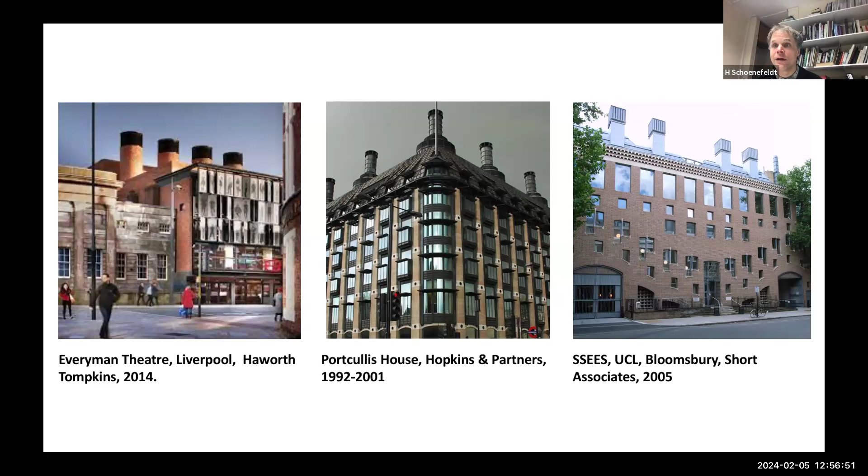So the question now is, when we're working with historic buildings that still have these in place, could we revitalize them and use modern technology, advance them, and build on that knowledge? So we can conclude really that adapting buildings to a changing environment is not new. So that's a really important thing.

In order to understand how buildings were actually becoming resilient to climate, we need to understand the whole life cycle of the buildings. And we learn through that not only the limitations of particular technologies, but also how far they succeeded by enhancing those systems or later adaptation to make these passive systems work effectively.

And extraordinary periods, as I mentioned before, are quite important to look at in this case. So can we learn something about the limitations of the system by looking at extreme moments of heat, of which there were several instances? And can we learn from that what the limitations of systems are?

And also, we need to understand the buildings as operated systems. So how were the buildings dynamically managed over time? How were these buildings managed under different conditions? And also, how do the buildings then continue to be adapted? And we need to talk about different kinds of adaptations here.

So one of them is physical: any physical changes done to the fabric of the building, particularly the adaptation of windows and so on. But also technological adaptation, which applies particularly to services. So how were the services changed over time? Heating technologies, lighting technologies, cooling, mechanical cooling, and so forth.